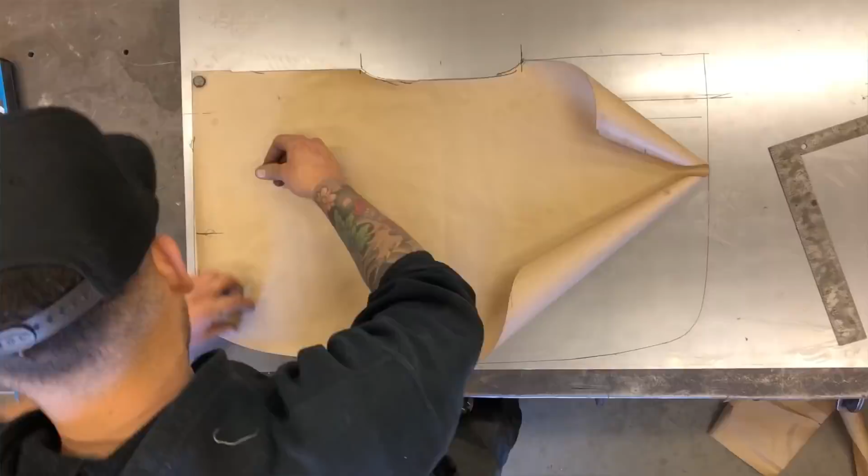What's up everybody, welcome back to Make It Kustom. Something a little different for this video. Right now we are kind of in production of the planishing hammers. We got a bunch of hoops here, we got all of our top bars here for the 24 and the 36, and we got all the 36-inch lower hoops here.

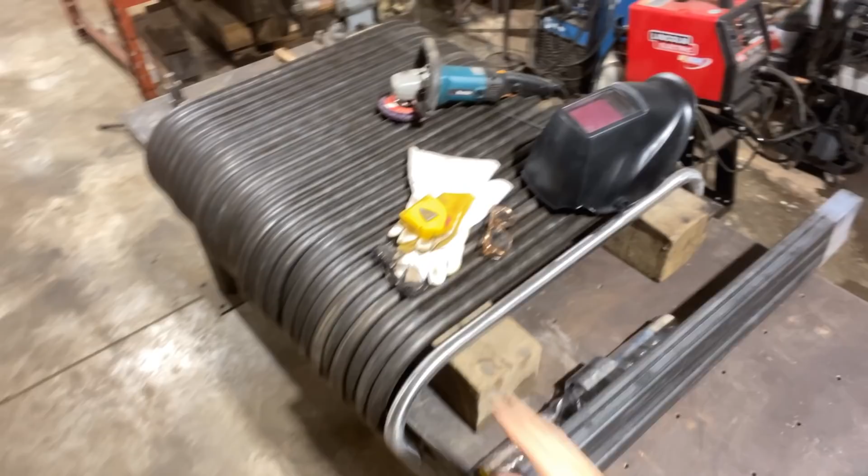So what I'm gonna do in this video is troubleshoot and figure out how I can build these hammers the most efficient and repeatable way possible. So what I'm talking about is building a jig to make these hammers. Obviously this is something I've never done before because I've built my prototypes by hand on the fixture table, but because we have multiples and multiples to do, we need to find a better way to make them because it takes too long to make one at a time on the table.

So my idea is to make a frame jig that has both sizes. We do a 24-inch hammer and a 36-inch hammer, so I want to be able to use this jig for both of them, and I want to be able to use it for the top jaw and the bottom jaw.

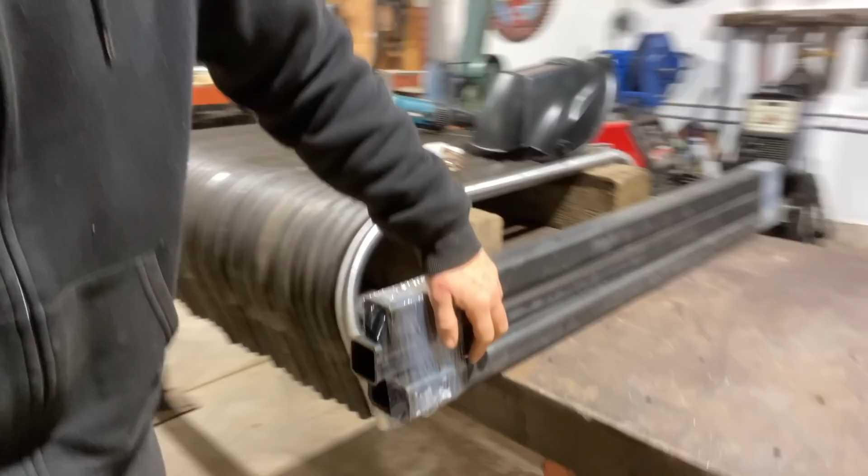So what I'm planning on doing - I've got some material here, this is 2x2 square tubing. I'm going to basically make a U shape out of that 2x2 square tubing, and at the top of that U shape, I'm going to have a piece of 2x3 1/4-inch wall HSS. You can see this is the really thick stuff right here, 1/4-inch wall, and that is going to be what the frame jig backbone is essentially.

So I'm gonna be able to weld fixtures to it that will hold the hinge of the jaw and the tool holder or die holder. That's for the lower jaw, and then for the upper jaw, it's got to be able to hold the hammer head and it's got to be able to hold the hinge as well. So one side will be for the bottom jaws, so we'll have a mount for the hinge and then two different spots for the 24 and the 36-inch anvil holders.

And then I want to be able to flip this jig over and use the same bar so that I can fixture my upper jaw, which I'm going to show you on the actual hammer. So the top of the jig will be able to make this top bar, the bottom of the jig will be able to make this lower bar, and that's the plan.

I haven't figured out how I'm going to jig these pieces yet, but that'll come. It kind of one thing leads to another, that's how I fabricate things. I start at a point that I know enough information about to build, and then I build on top of that and build on top of that.

The other thing I'm thinking about is I want to be able to weld this all the way around. So if I were to build a jig that was clamped to the table, I'm gonna weld one side - how am I gonna weld the other side? Do I gotta unclamp the jig and turn it around and weld the other side, or do I gotta get all contorted?

So what I'm gonna do, hopefully - this is my thoughts anyway, this is gonna be a little bit of trial and error here - I'm going to make the whole jig spin. So I've got a 2-inch, where is it?

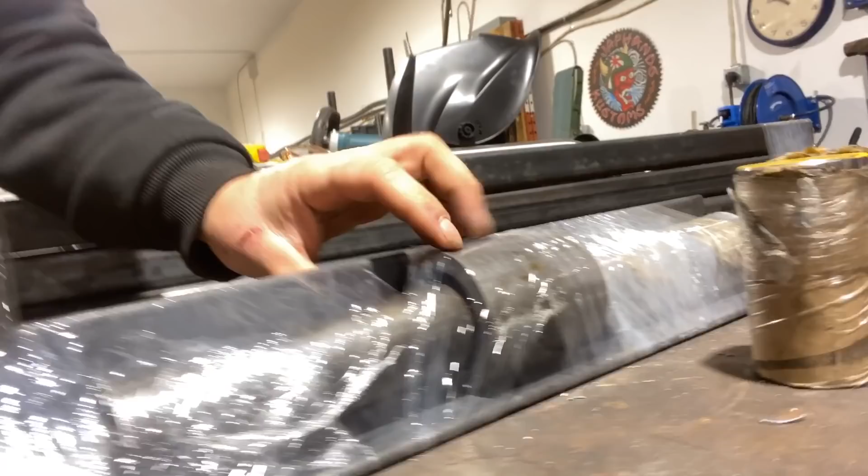Anyway, the spinning part of this jig was solely because I seen the material there. They had a nice chunk, a 2-inch, I'm not exactly sure, it looks like 4130 or something, 2-inch solid. And then they had a piece of DOM wrapped up here, like 3/8 wall, or .375 wall or whatever. That's gonna be like a heavy duty hinge point that could support the whole jig, right?

So anyway, you'll see what I'm thinking. I'm thinking about stuff, you'll see what I'm thinking.

Let's get into the video.

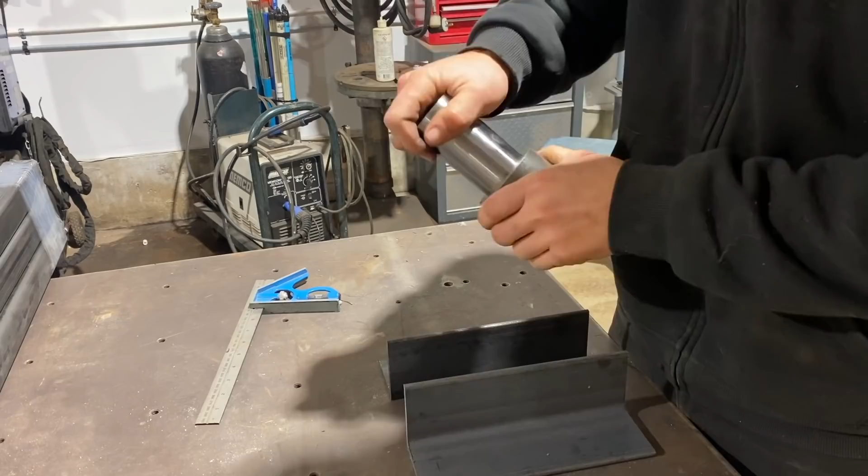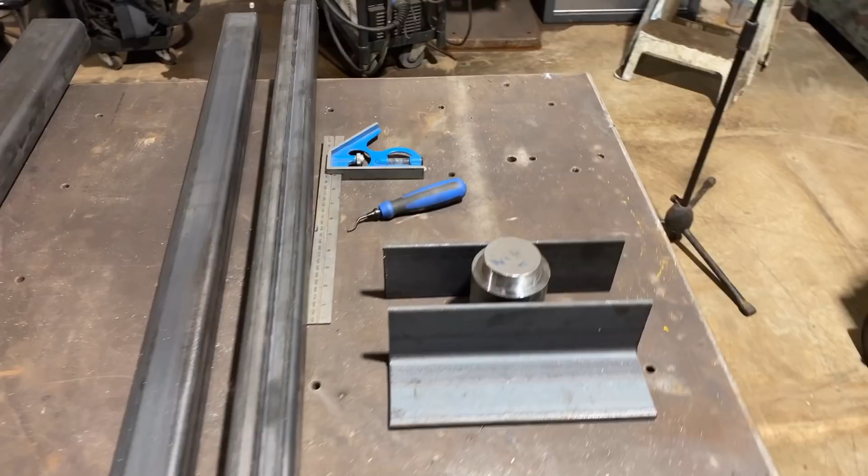Okay, so this is our pivot on the base. This is the base of it. We're gonna be able to clamp this to the table, or maybe bolt it, but our actual jig is all gonna pivot off of here so that we can swing it around like I was saying.

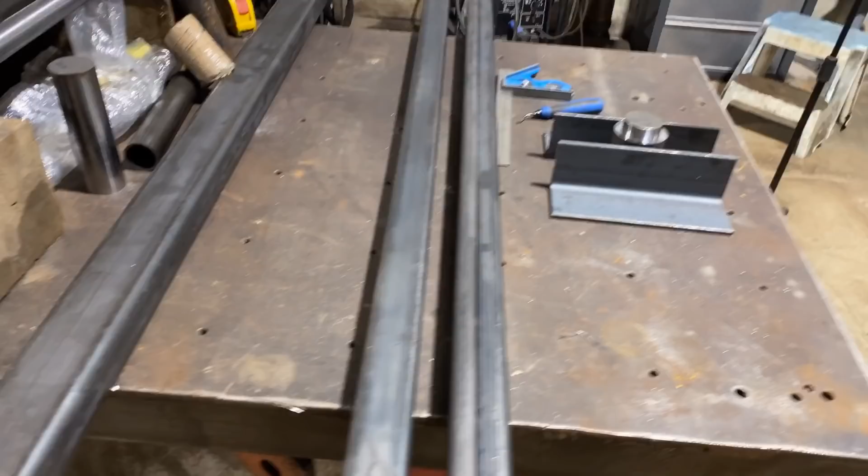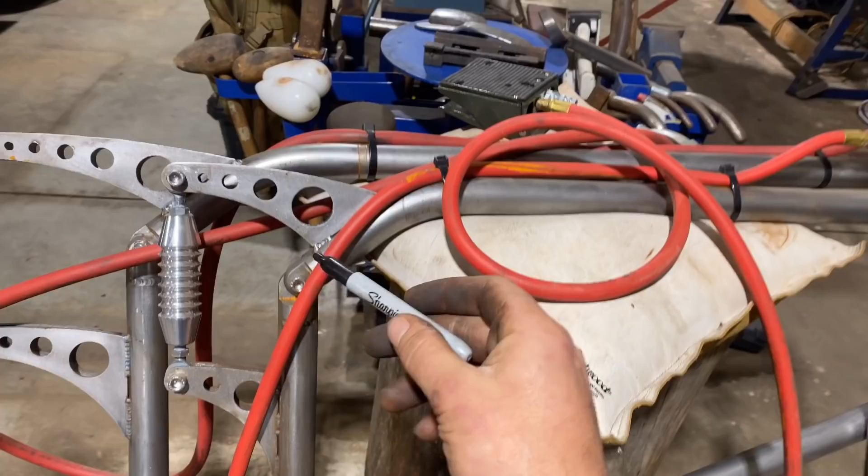This is the material I'm gonna use for the U shape, and in between the top of the U shape is this thick bar, and that thick bar is actually the jig. I'm gonna try and illustrate it so you guys understand what I'm saying. This piece of the hammer will need to be jigged on one side, so both lengths can be on one side. The lower hoops can be on the other side.

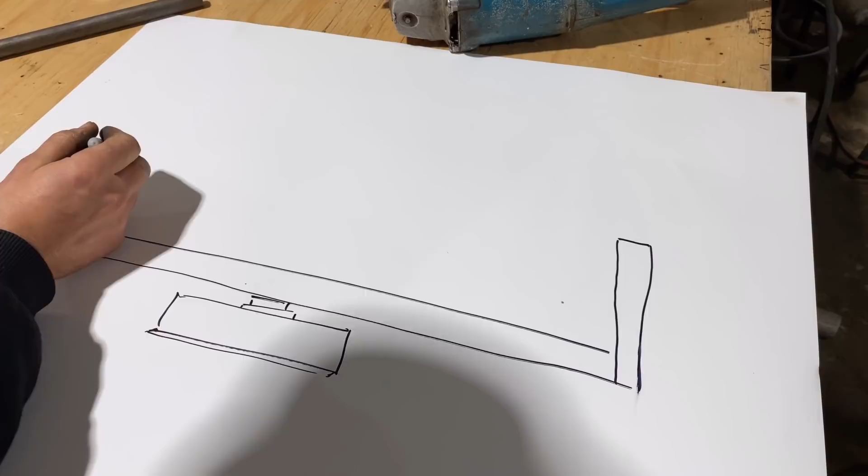Now I want to put a pivot in here, and the reason being is, like I was saying, that 2x3 heavy wall HSS is going to go in here, and I want to be able to pivot that. The one part of the jig is going to have our...

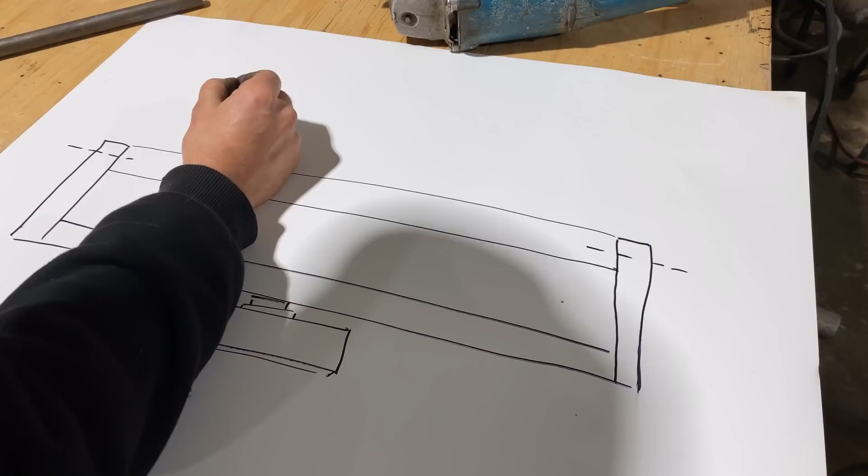That's a terrible drawing of the hammer hoop, but there it is. This is a tool holder, so that we can put our actual, this is our lower anvil holder from the machine shop. Look at how nice that is. I don't know if it's focusing. Anyway, that goes there, so that'll be jigged.

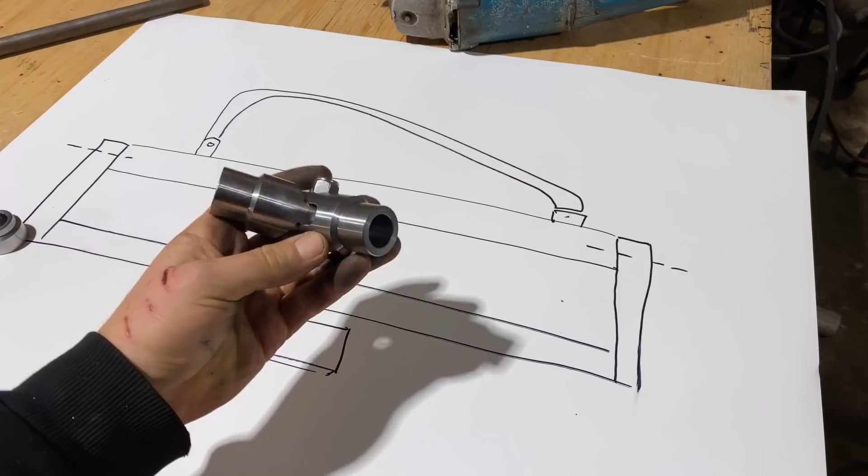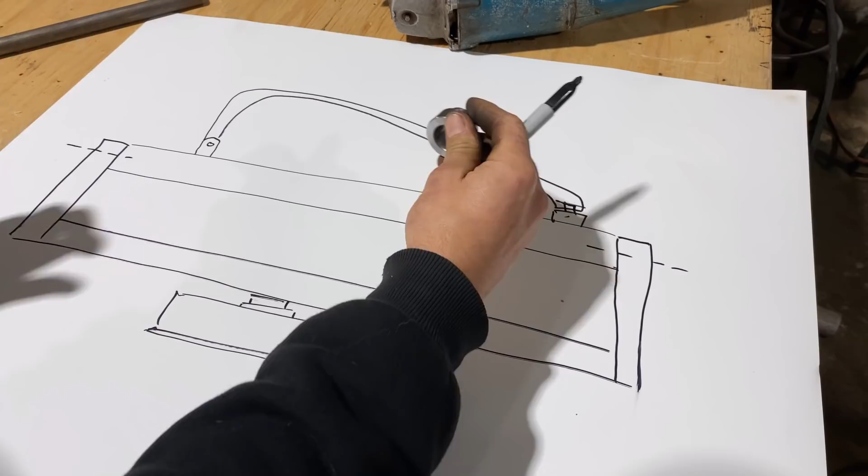This back part is the hinge, so this right here is the hinge. That needs to be bolted in place right here, so that we can make sure all of our lower hoops are all the same. And the beauty about this is I'm gonna put a second one here for the anvil holder, and it'll have a little nub on it to go inside the anvil holder. It'll slip on like that, and then we can weld our tube.

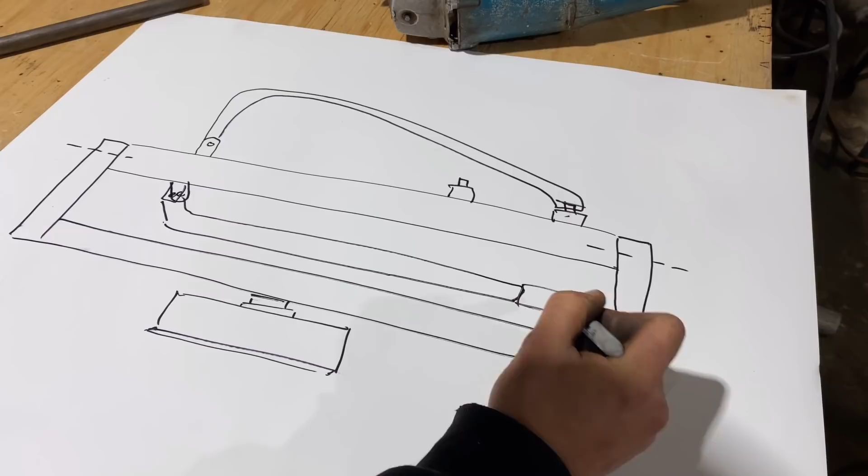Now the other side is gonna be the other side of the hammer, so we're gonna have another pivot here, and that shouldn't have been on an angle, that should be straight, to be able to hold the other part, the upper part, and the hammer head. So I want to be able to use this jig for both, to make my lower jaws and then flip it to make my upper jaws. And I want to be able to spin it this way so that I can weld it really well.

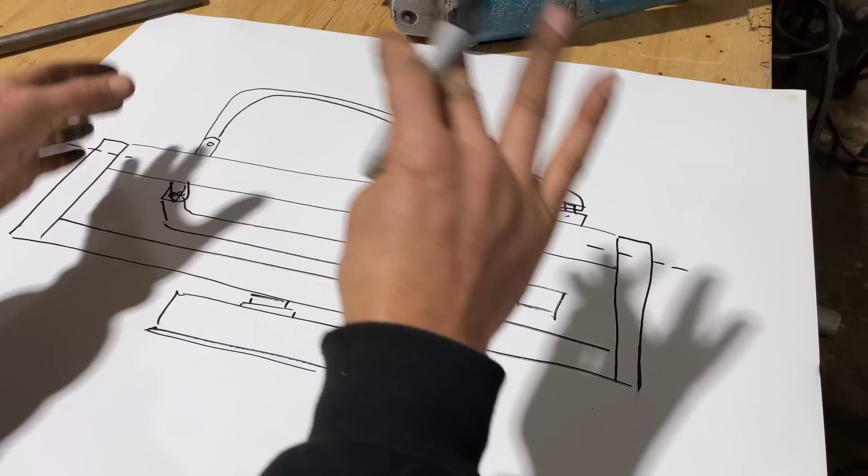All this extra time, it's like TIG welding - all this extra time in making a really full functioning jig like this is going to save me time on the back end. Just like TIG welding saves time on cleanup, building jigs saves time on manufacturing. And this also makes sure that our quality and repeatability is all here.

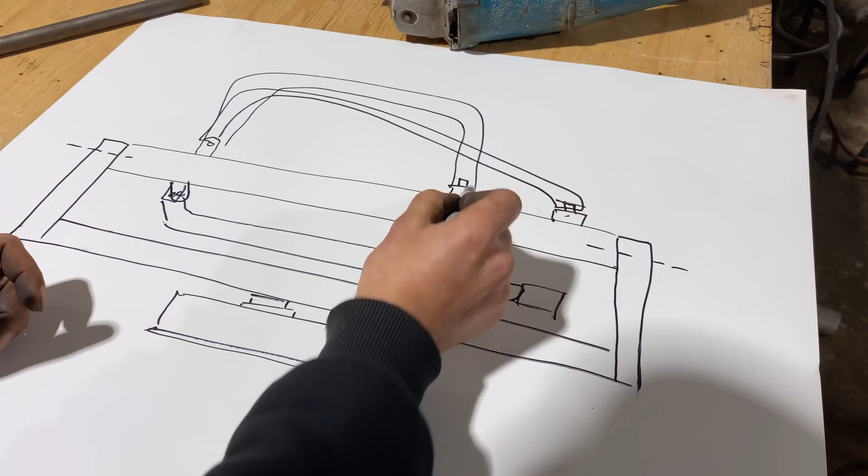The other beautiful thing is that the lower jaws, which are all different shapes, we can have any size lower jaw shape in this jig. The other beautiful thing is that the sides of this 2x3 tubing right here are nice and flat, so I'm gonna clamp bars along it to make sure that these tubes stay centered. That's my plan anyway, that's kind of what I'm trying to build.

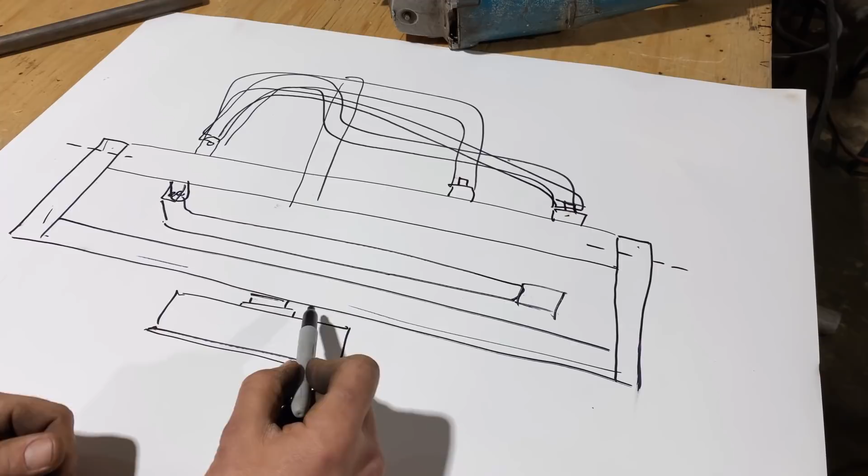So now I'm gonna make this U shape, and I also want to make a way to stop the pivot, so when I pivot it, I don't want it to just be free pivoting and loosey-goosey. I want to be able to pin it in different locations. So at this point, when I'm building this pivot - if this is a top view of the pivot, here's our angle iron, this is top view, here's our angle iron.

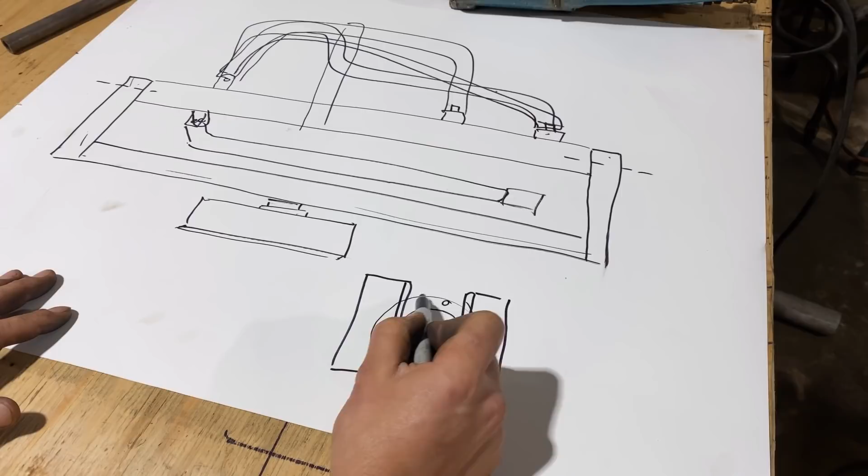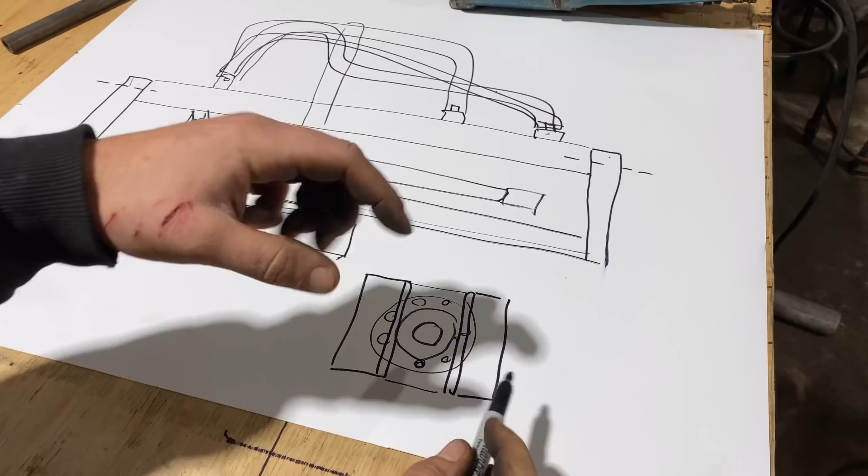And we've got our pivot in the center. I was thinking maybe if I made a circular ring that attached to the center pivot and it had holes in it, and if I made a plate that went across and bridged the gap so that we're not just welding in here, we're able to weld a plate here with a big hole in it. I could put a hole in this plate as an indexing hole, so I could essentially pivot this ring and drop a pin in the hole and stop it at different locations so that the jig is still solid when I'm welding.

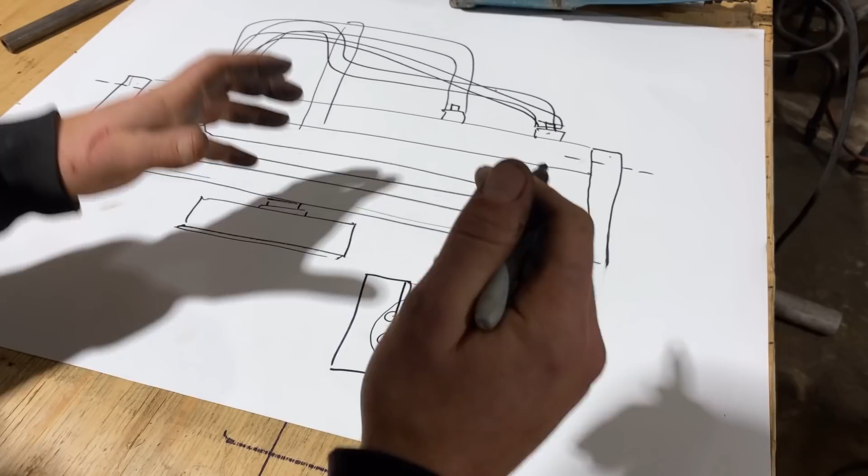The other thing that I was thinking of is that obviously we need a way to lock this pivot up here well, so I can either do a ring there and index it, or I can do a big wing nut bolt setup so that you can just tighten it in a spot. I think that because I might be leaning on the jig here and there to weld it, that having a center bolt that tightens down might not be the way to go. It might be better to have it similar to this and have an indexing plate.

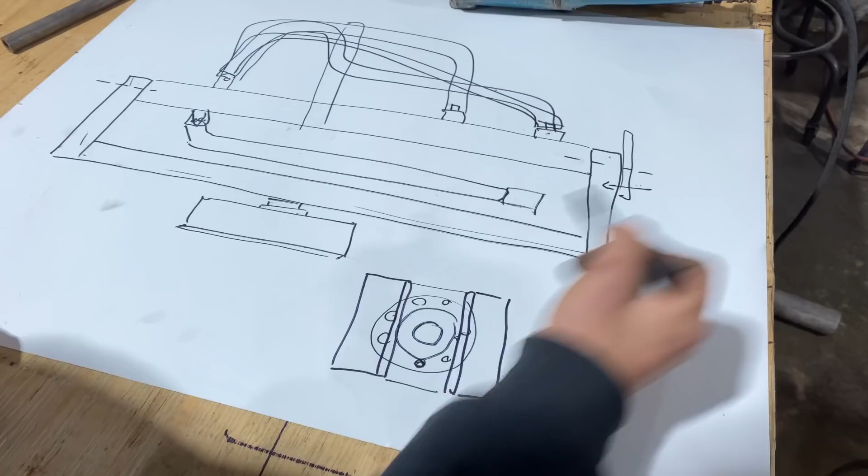I guess you'd only need an indexing plate on one side to lock it, so that's something I might do. I might make an indexing plate on the outside of this that I can lock a pin into the tube so that we can rotate it to different spots and lock it in.

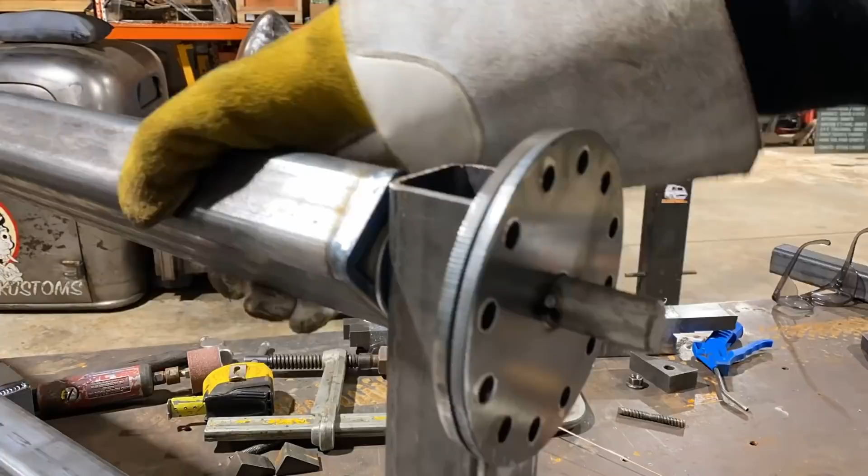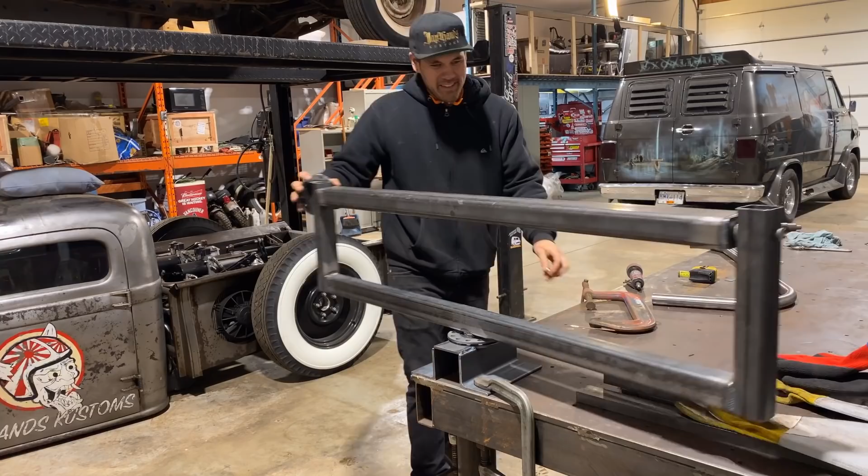What's up? We got the jig done. She spins, you know, round and round so that I can weld all the way around. We spin this way as well so that we can have a fixture on the top, flip it to the bottom. We can also flip it to the side to weld things easier in different positions.

For TIG welding, a lot of it's all about how comfortable you are and how well everything fits and what position you're in. Sometimes welding something in a flat position will produce a better weld, or be more comfortable to weld, which will produce a better weld than welding in a vertical up position. So this jig is gonna allow me to weld in many different positions so that I can get really nice welds on all these hammers, and we're all about that.

So the next thing I've got to do, now that the jig is complete and it indexes, it twists, it does all that, is I'm gonna make my couple of master copy hammers. I've already got prototypes, but since all these parts are newly machined and redesigned, I'm making 2 master hammers again that come from the same production run of tubing bends, that come from the same production run of CNC parts, so that our quality control is accurate among all of our hammers. And that is the whole purpose of doing all this prep - not only to be more efficient, but to be higher quality with our end product and more consistent.